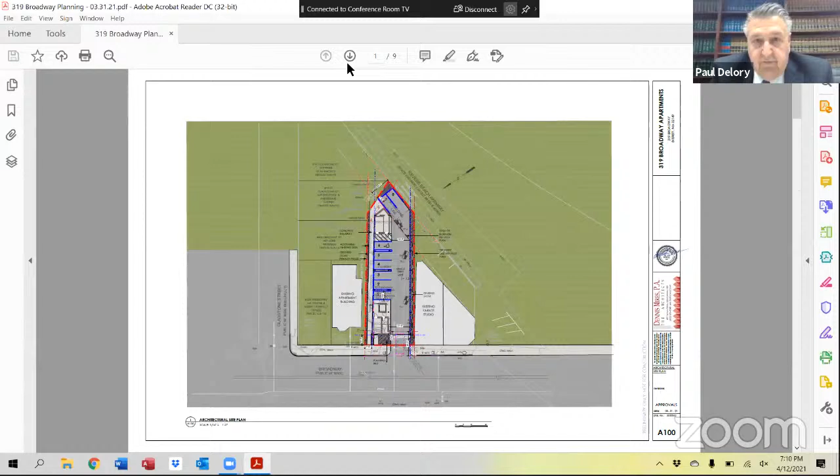Great, thank you. To the members of the board, I just want to refresh your memory - the proposal is to raze the existing building, which is an old and abandoned single-family residence that served at one point as a funeral home for the Rocco family, and to erect a 20-unit building with 3 affordable units.

We were before the board and there was a significant amount of discussion last time concerning the amount of masonry in view of the building standards. So the team went back and put our heads together to address that issue that was raised. We did so by adding additional masonry to the facade of the building, which would be applicable in terms of facade building standards - that's the facade that faces Broadway and the Revere Beach Parkway.

If you look at the proposal - I'm also joined on this Zoom conference with Mr. Mires, who's the architect. I know you were on the screen earlier, but I was looking for you. I think he's here in case he wants to comment. But if you look at page 201, that's up on the screen right now, we'll share the screen on our end.

The overall facade on that Broadway elevation is 2,400 square feet, and the brick required at a minimum is 20%, or 480 square feet. The brick now provided is 960 square feet, so that's 40%, double the minimum requirement. If you look at the long column, you'll see it's been extended upward towards the top of the building, and there is brick around the garage door. So that's one item that's been additional.

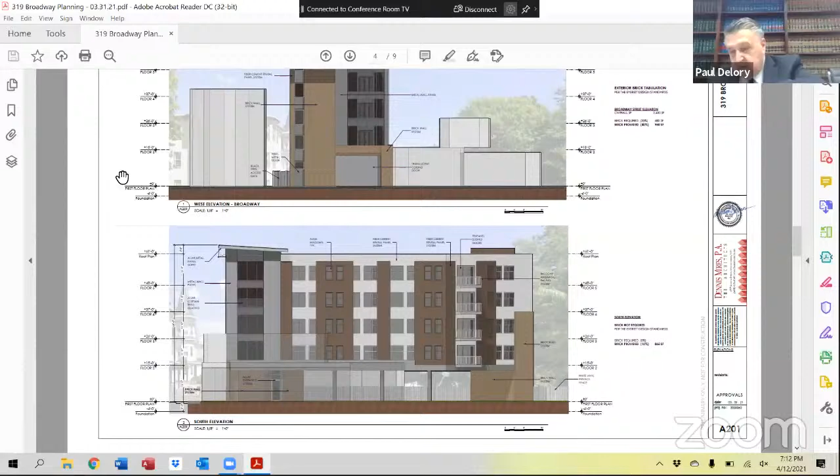If you look at the second picture on that slide, under the building standards there is no brick required on that side of the building because it doesn't face one of the major thoroughfares. However, the architect has provided 15% brick, 865 square feet. If you look at the next slide, 202, this is the back of the building, the rear that faces the Revere Beach Parkway, and that's 2,120 square feet of area. Again the minimum is 20%, 425 square feet, and the architect has now raised the column of brick to 32%, for 660 square feet.

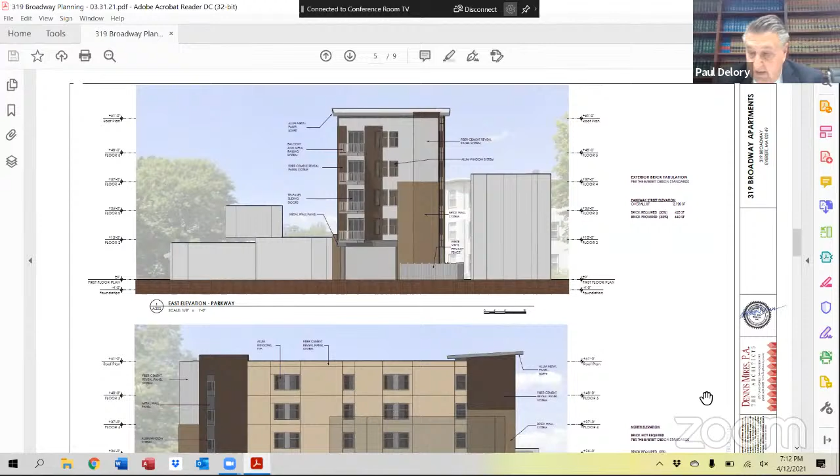And then lastly, if you look at the other side, which would be the north elevation facing up Broadway towards Everett Square, again, it's not a facade which faces a major thoroughfare, so it's not technically covered by the building standards under the architectural details. So there is 0% required, but 15% has been provided, 785 square feet.

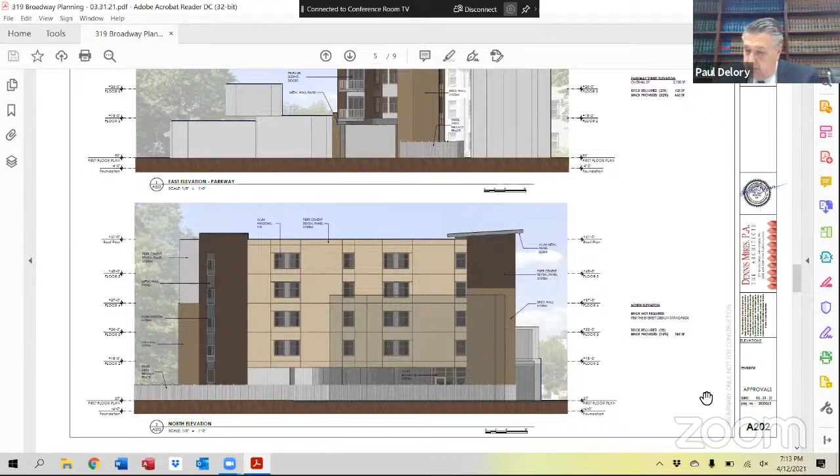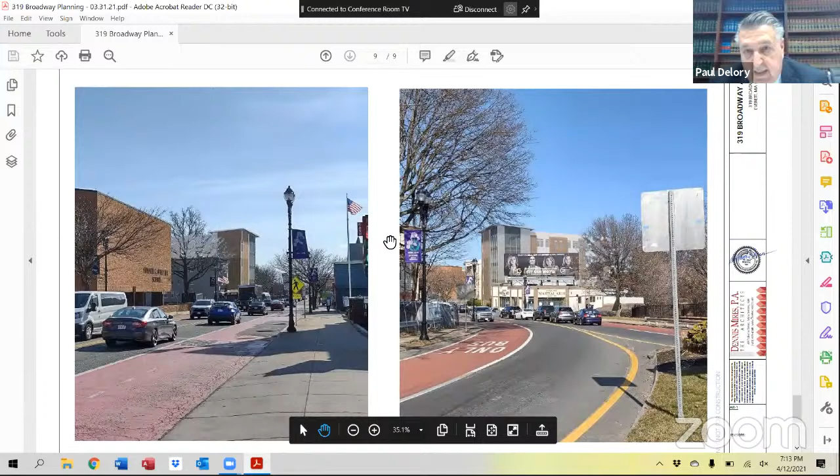If you see where the building is sited and you can see how it will look when completed, the north face is nearly entirely covered by a three-story house next door. The south face facing Boston is significantly covered except for the top floor, with both the karate studio that's there on the corner plus that billboard.

And so the addition of even more brick there wouldn't achieve the look that I think the board wants, and certainly it seems like it would be an extra expense. They'd rather concentrate on the front end and the rear of the building. So I think that's important to see, that every effort has been made to try and blend that in.

And again, I'll let Mr. Mires speak to that, but that's been the concept of using both a darker brown, a lighter brown, and the light color in there as well.

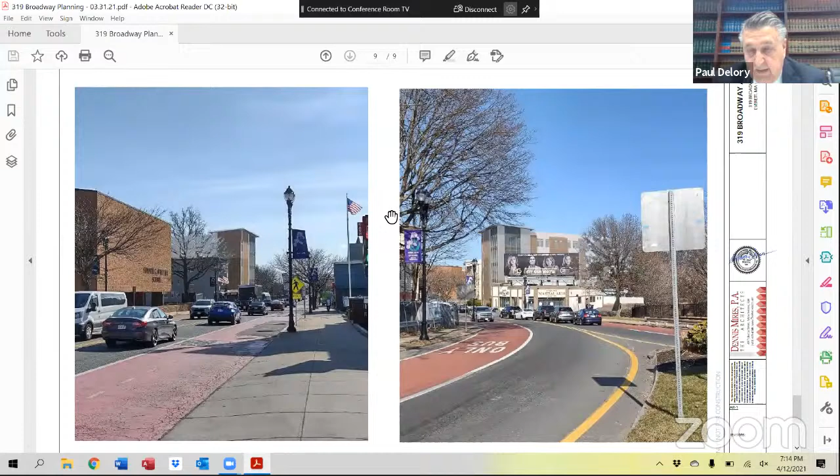One of the really dramatic effects of the building, which is very appealing, is the aluminum corner there with the glass and the aluminum paneling on it. That's a very striking look as you come around the Rotary. It's a very, very impressive look to see.

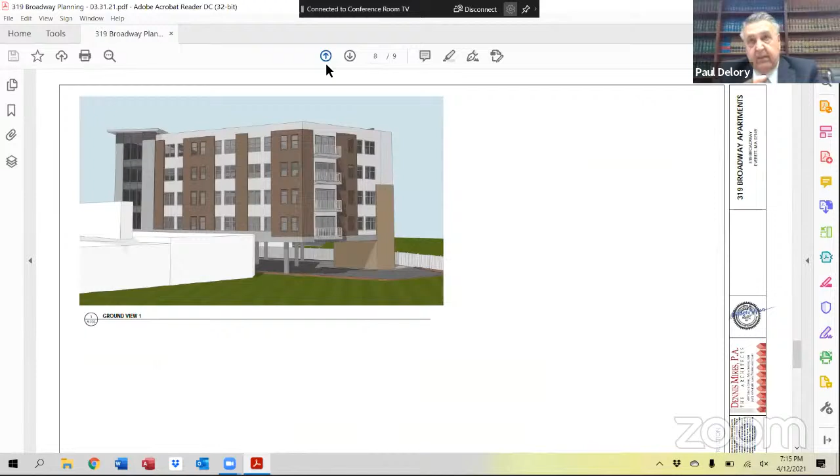And a couple of things I want to point out with regard to Mr. Catino's comment: he talks about parking, but you think about this building, there's 8 parking spaces for this building. And there are no other resident stickers that will be allowed, and if there are any allowed based on frontage, it will be very small.

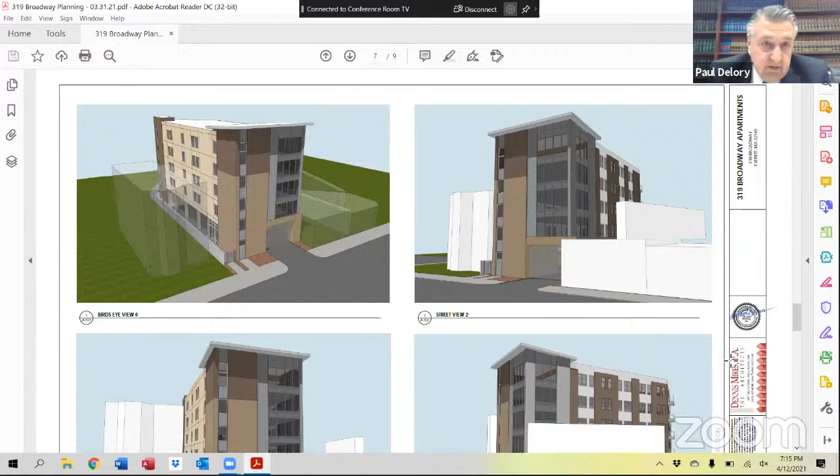The people that have a car that can park there, that's one thing, they'll park under the building. There really isn't any resident stickers for the remaining residents. So there's really not any negative impact in terms of parking.

And, with all due respect to Mr. Catino, I drove by and got out of my car and looked at his building, and he's got a full house there with a lot of the residents parking in the schoolyard. Watch some of these people get out of their car and walk across and go into his house. And that's a 3-family house with a number of people in that house.

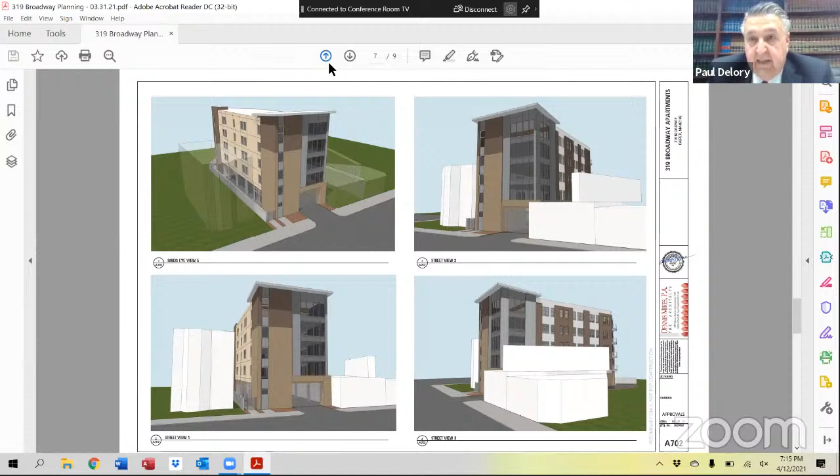So I don't think the building would lead to parking issues as much as the density that he has there. He has probably a greater FAR than this building. So I just want to clear that up. I understand his comments and I respect his comments, but that's something that we are not going to contribute to the parking issue beyond what's going to be parked on site.

So I'd be happy to answer any questions.

I'd like to ask Mr. McKeon if you want to add anything to that. I don't know if you can hear me. I can. Can you guys hear me? Yeah, I can. Yes. Thank you, Mr. Chair and Board. This is Mike McEwen from Dennis Mires, the architects. Paul, I think you did a great job. Thank you.

And I don't have anything to add at this time. I'm sure there'll be questions. That's why I called on you.

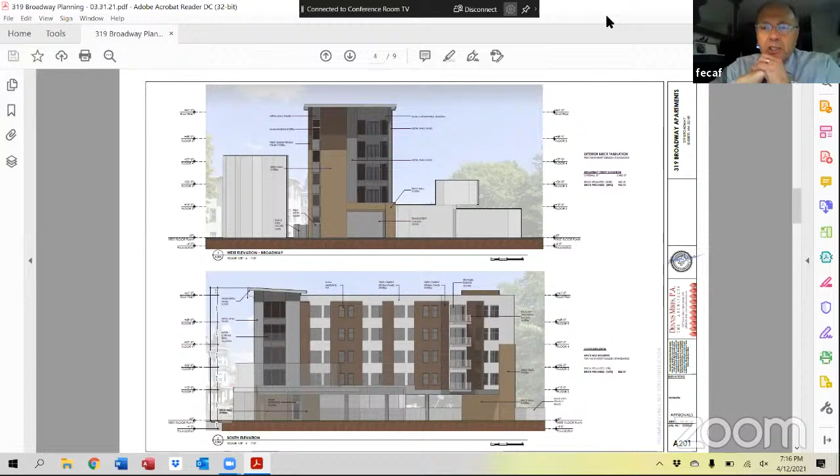Now, Mr. Delory, can you hear me? Yes, I can. Now, from our meeting this evening, whether it goes and continues or whether it passes or doesn't pass, the next trip is to the Zoning Board of Appeals, is that correct? That's correct. So we're the first outlet, and then your zoning ZBA is next, is that correct? That's correct, and just to complete the circle, as Attorney Stein mentioned, we'll be back to you for the inclusionary zoning.

We use one particular agency, but this particular client has worked with another agency, and they're engaged now, and I would think shortly we'll file an IZ request with your board. But yes, the next stop is the Board of Appeals. This sort of came up when Jim Soap was building inspector. They reversed the process, and they wanted to go to planning board first, then ZBA, and this started under that format. So that's why we're here first as opposed to ZBA. Thank you.

Can I just clarify through you, Mr. Chair? This is Robin Stein again from KP Law. When you go to the ZBA, you're going to be looking for variances for parking, FAR, and number of stories. Anything else? That's it. And you're providing, is it 9 spaces on site or 8? Eight spaces.

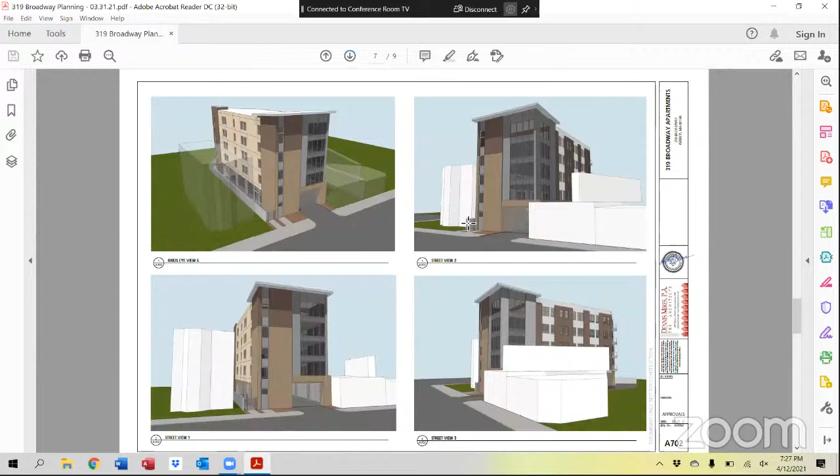If we can go to sheet A702, the view 1 and view 2, the top there. If we can zoom in a little bit to perhaps the coiling door, I just wanted to address that first. So we heard the board's comments last time that we didn't want something that looked like a garage door per se, that we wanted something inviting. And the idea here, if you look closely at the images, that was not able to show in the rendition on the last sheet, just given the perspective.

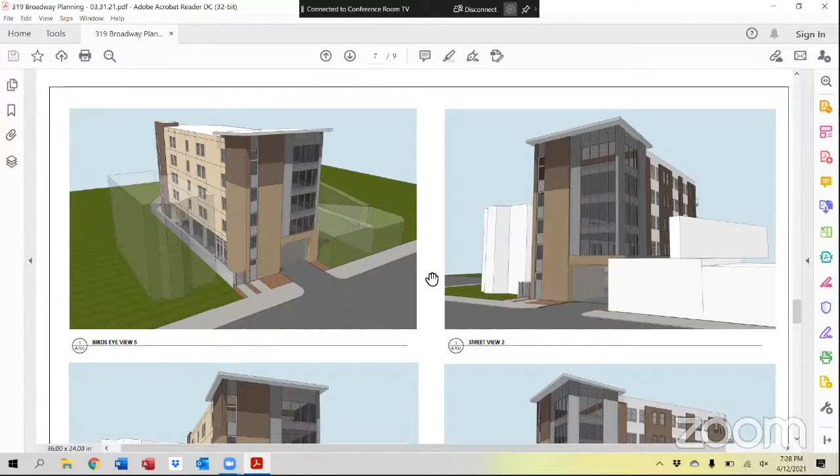This is actually a tinted dark translucent material. So if you look closely at these images at the door, you can actually see through the door. The idea was that you can provide a door that has a tint to it for safety reasons, but that it's inviting. It doesn't have that metal slat look that Mr. Pisano was referring to here. We tried to address that in the notes on the elevations, as well as these views, which tell the picture best, that we wanted something that would function safety wise, that would have some visual privacy, but also not be aesthetically unappealing.

And what Paul was referring to in terms of the setback, you could see that the brick returns in and around all sides of the door and actually deep into the building, which you can see on view 3 right there. I believe you only set back 3 foot 6 inches from the face of the building with that coiling door.

Yeah, it's 3 to 4 feet, Leo, but it's 26 feet from Broadway. Yeah, but that's not what we see. We see it from the building. It's only 3 foot 6 setback. Right. The goal here was that you could get a full-size vehicle, a full-size extended cab truck, or a work van, a longer vehicle off of Broadway up to the door with time for the door to open and queue and not hold up traffic or impact traffic.

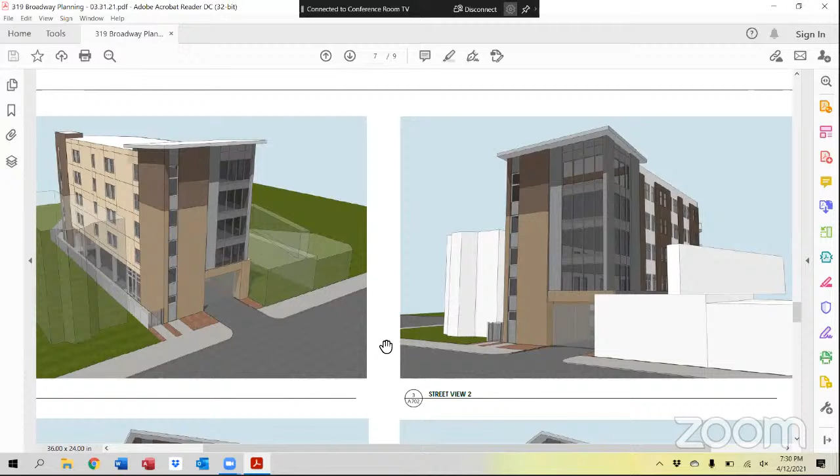Why couldn't you move the door deeper into the building? You have plenty of space. I'm looking at your architect's page A100. You seem to have plenty of depth. And as far as the aesthetics of that metal door, that metal grate, let's call it a metal grate, a plastic, whatever, it looks like a liquor store where they pull down the grate at night.

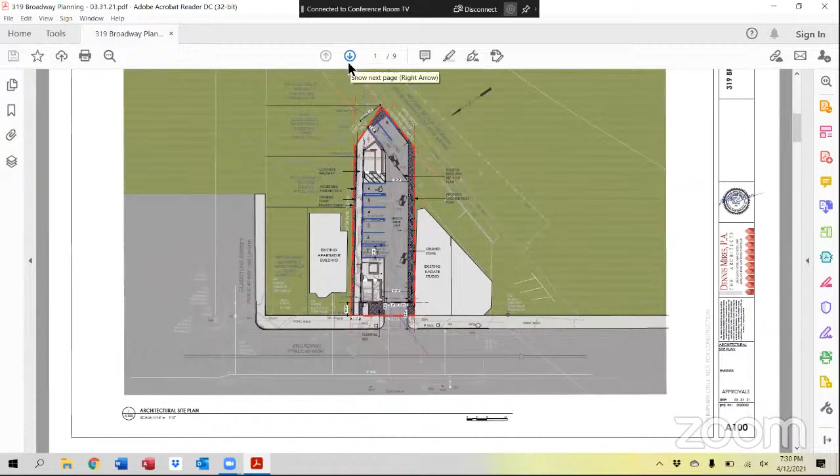It doesn't look. So Leo, I think you're missing the picture here. This is actually a see-through material. It's not going to look like a metal material that you'd see. If you go to those images, you can actually see that there's some transparency to it.

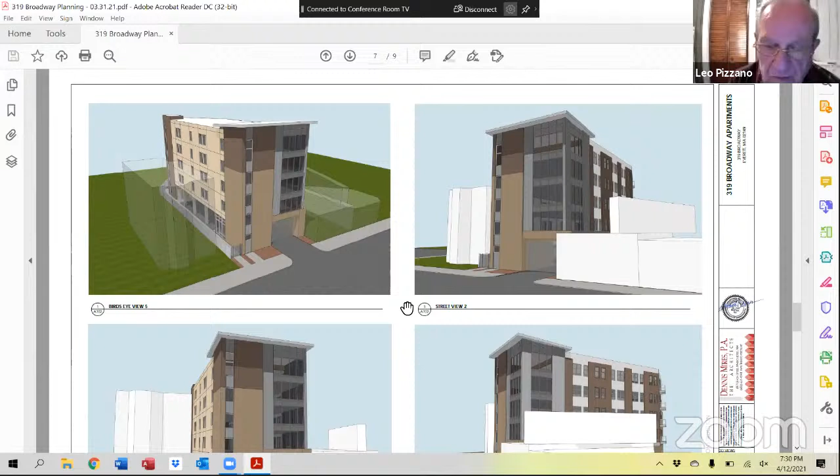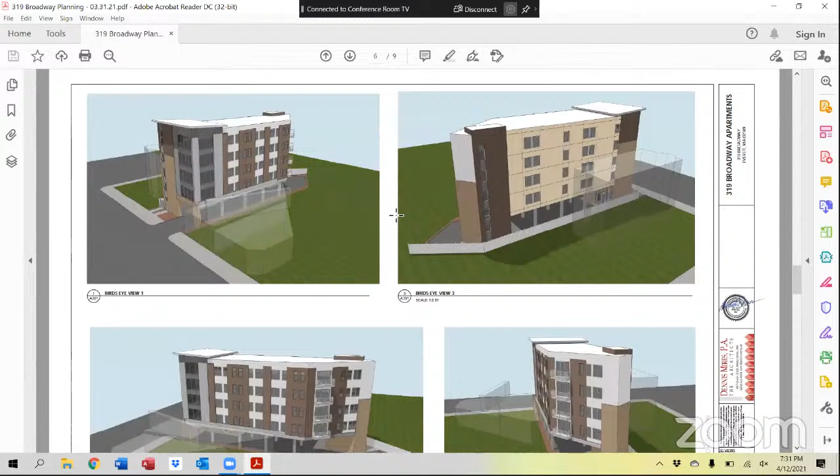That's correct, you can see through it, or it's translucent to an extent. Maybe if you brought us a sample of the product, we could understand it better. Sure. But to your earlier question, if it's possible to move the door farther into the building, I'd say that it is. What we were trying to be sensitive to, if you look at that A101 sheet, is there is an access door from the garage side into a small vestibule, and we just wanted to find a nice balance between the approach side on either side of the door.

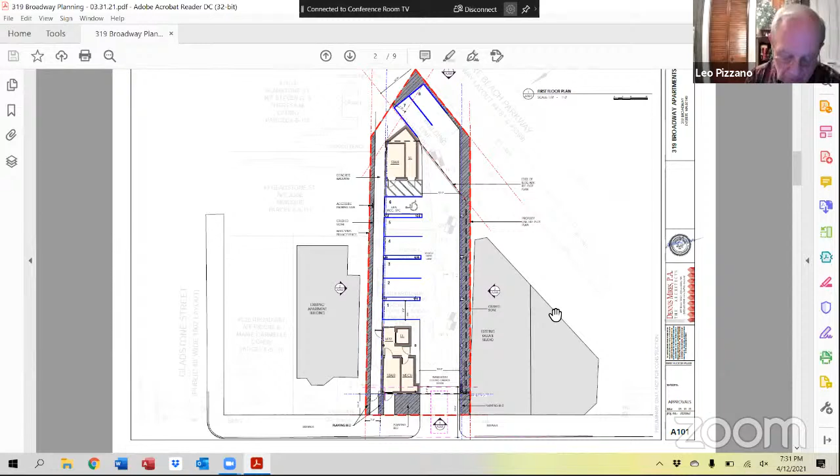Such that people aren't in a space where a car is going to be when they're exiting through the door. You can see the small man door there, just north of the mechanical room. A good building to look at is the Rovierre building right next to City Hall. If you look at that, it has a coiled door, but it's probably set 15 feet deep into the building. You don't even know it's there. That's why I say setting that deeper into the building will just negate that it's even there.

Sure, in all honesty, I feel like we have a lot of options with the door. Good. And it's not a difficult thing to look at different door types and or setting the door deeper into the building. If that's something the board would like, it's certainly something that's not difficult to do.

What we wanted to do is have the door almost blend in with the facade, and that's why we tried to go with a dark tinted translucent material, so that you're not even noticing that it's there. It does its job, but we really wanted the brick to be the standout on Broadway because it's going to be very, very striking.

We agree with that. That's why I think the door, whether it be translucent or whatever, detracts from the beauty of the aluminum tower, your glass and aluminum tower. I think it detracts from it.

It can be set back where you don't even notice it. I mean, that's whatever. Try to come up with something, Mr. McCann, please, would you, to remedy that? Make the door disappear. I don't know why you don't get rid of the door altogether and put in, like I say, a wrought iron gate that opens up.

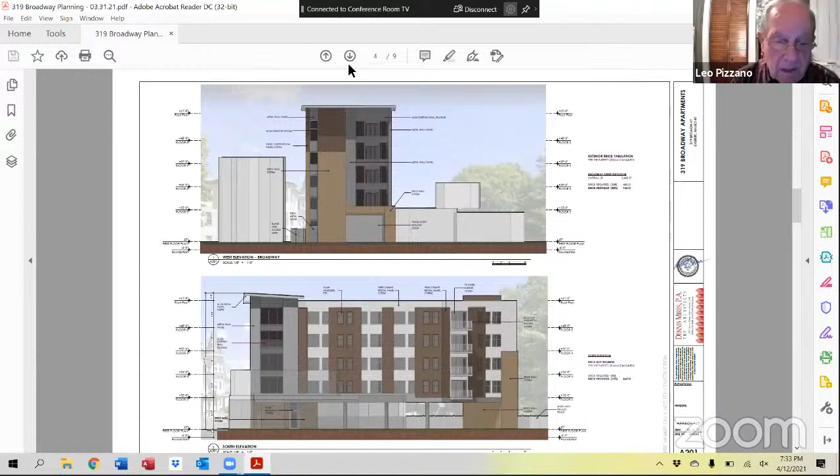Again, I hate to use the term like a villa, but something that has some aesthetics to it, that looks nice, that you can leave out there and you just push the button and the two gates open up and the cars go in and out, whether it coils up or swings in. I don't know if it matters, but I think there's a lot more options than a coiling door.

Yeah, I will just add to that. The swinging gate is a nice design feature. Unfortunately, we're limited with the space that we have between the door and Broadway and inside the building. So we need something that's going to raise vertically and up and out of the way where you don't need 10 foot in front of the vehicle for it to open.

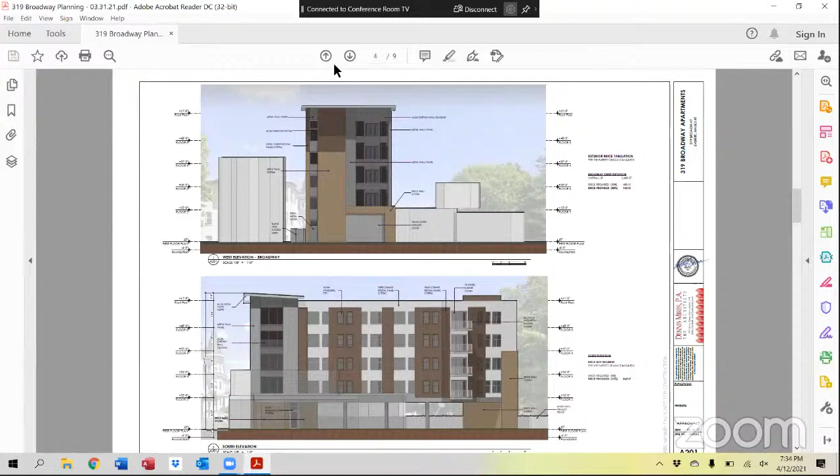That was the reason. Why can't it open in? Well, again, we're trying to be sensitive to people parking, pedestrian walkways, and where the cars are going to queue inside the building as well.

I'm looking at you. I can address the green space. With regard to the design standards, we had large planting beds out front of the building at the base of the masonry walls that we'd like to have flowering plants or some other type of greenery.

And we also have an option all along the privacy fence and in other various areas within the site to provide more than the 15%. You have more than 15% green space? Yeah, that's not an issue at all.

Okay. We had on the plans been toying with drainable materials, some river rock and some nice pretty stonework that's going to be maintenance free, and just hadn't dialed in exactly how much of each we would have just yet.

I don't think it's a problem between your building and the karate school, what product you use there. It becomes an alley more than anything. When you exit out the back of the karate school, that should be green space, not gravel or stone. It should be grass, period. Be honest with you, or plant shrubs, whatever. That's why it's called green space.

Yeah, and we have no problem meeting the 15%. That's no problem. Okay, very good. So again, I guess we're stuck on a couple of issues.

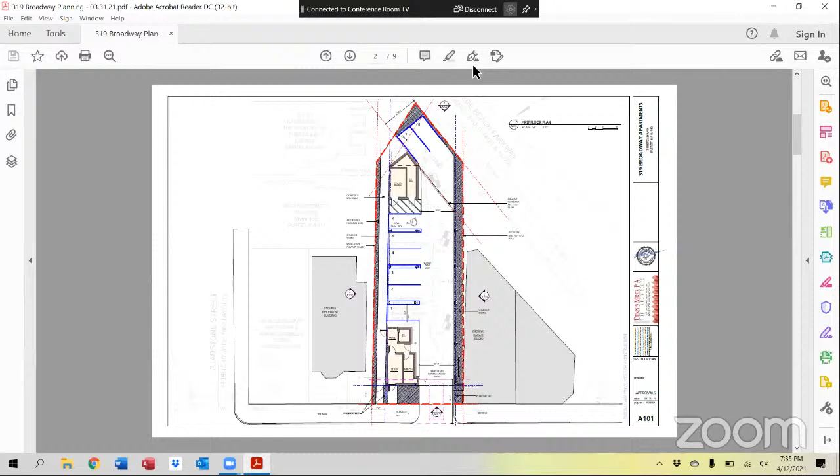Yeah, and I would just reiterate to Mr. Delory's comment, we did fight with the height and the stories of the building and looked at it in great detail to try to reconfigure the units. There's been a lot of study and a lot of time put into that. And given the dimensionality of the site and the space that we're working with, unfortunately, that fifth story is a must to get the numbers to work for our client.

But I will also add that we were very sensitive to the height, and that's why we kept the stories as short as we could to keep us underneath that 65-foot maximum height for the building. And we tried to be sensitive of our surroundings, and we think that rendition, that AR1 sheet, is a really good example of trying to meld the new modern elegant aesthetic with the traditional and the brick, and just have a really nice showpiece as you come into the city from Boston.

Okay, well, try to put as much together for the next meeting as you can, and we'll go through it again and see what you come up with, okay?

So, any other questions, I can ask Tom? Leo, if I can, Mr. Chairman? Paul, so you would like a sample of the garage door material?

Is that one of the things you'd like to see? You can bring it, but I'm almost negative to the whole idea of it being any kind of coiling door whatsoever. I can't see why it can't be a gate that opens into the building. If you have a 19-foot opening there, 2 gates, 10-foot whatever, and they open in. There's no cars queuing in there. You're not supposed to be parking cars there because then people can't get in and out.

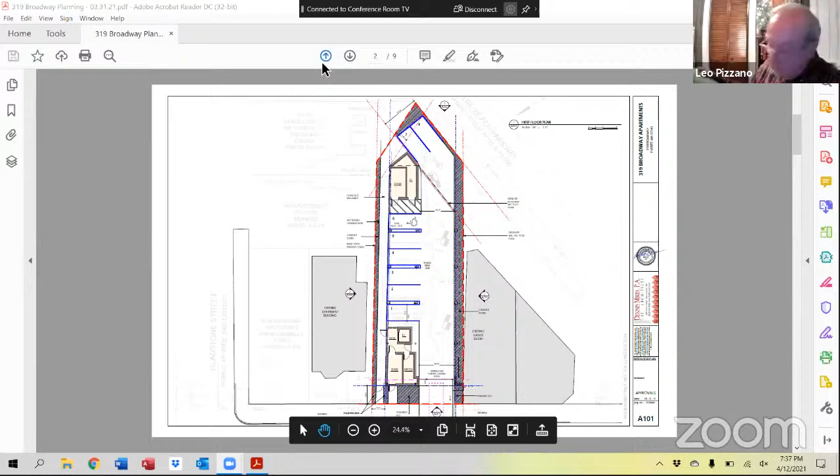So as I look at your drawing here, A101, and I'm looking at that area, you have a great deal of area there to allow those doors to open in, no problem at all. And I would really like to see those doors go and put something nice there that even in a closed position, if it is only 3'6" back, looks nice.

Let them open in. And as far as queuing, you're right, they should be even deeper into the building so you allow better queuing so pedestrians don't have to stop when you've got a truck sitting there waiting for the door to open. Not that it takes more than a couple seconds - I'll agree with that, I don't find that being a problem if you had to wait 5 seconds for a door to open and a truck go in.

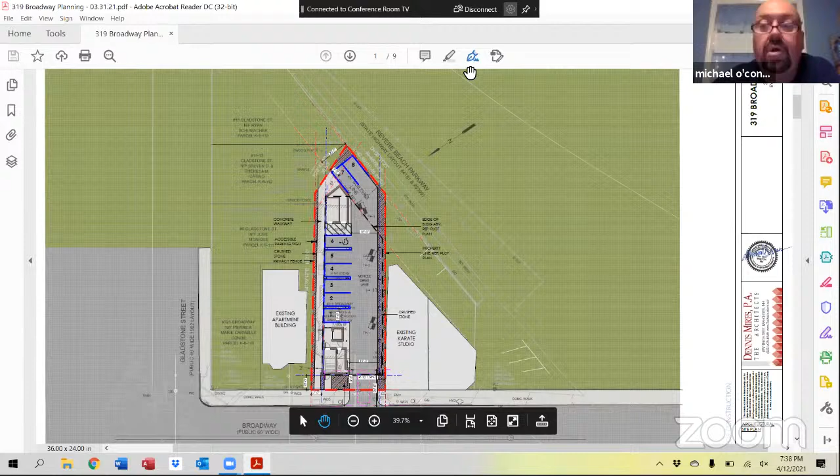Thank you. Any other questions or comments? I've got one question - does anyone know the approximate height of the current building? The building that's on the site now, the current height of it, any idea? I don't, maybe the architect can say, I'm not sure.

It looks to me, based on the photometric plan on A202, Mr. O'Connor, that it's about 38, 39 feet. That was going to be my comment as well - it looks to be just above 35, 37, 8 feet. Okay, thank you. Yep.

Any other questions? If I could also just say, one of the difficulties in dealing with this particular zoning matter when talking about height is that the city makes a determination that 65 feet is the maximum, and the fact that the stories are a little bit lower was still within that 65-foot limit. So the intent of limiting the height has been met. Just by virtue of the fact that the floors are going to be a little bit narrower to accommodate that 5th floor, it really still stays within the height range. So a lot of thought went into that as well to make sure that was not one of the areas in which we were out of compliance dimensionally.

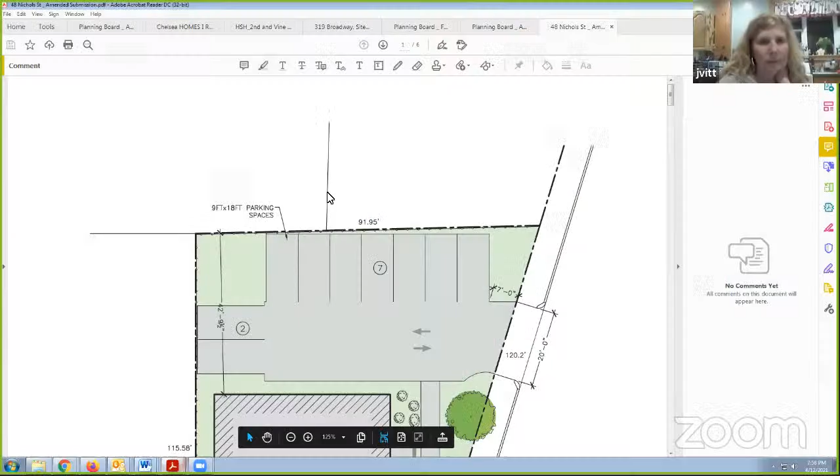So members of the board, if you recall, I was before you about 12 weeks ago with a similar proposal to build a 6-unit building. The building shape, size, and look hasn't really changed.

I have made some material changes to the plan as requested and as heard by the board. I changed the entrance from the Nichols Street side to the Woodlawn Street side. I moved the bump out down from where the porch was to the corner of the building. I removed 3 parking spots, 2 of which came into question before the board because of the side yard and rear yard setbacks. Leo had commented that he was concerned I would probably need a variance because it was too close to a window, so I eliminated those when I reconformed the building.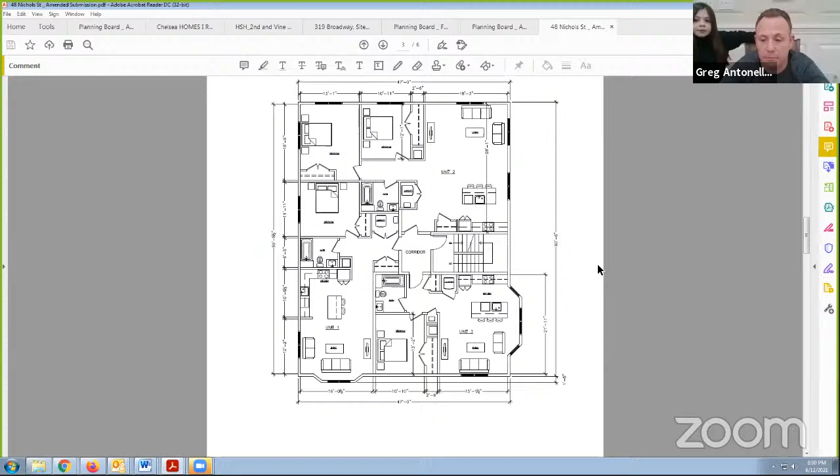I have a question on this. Go to the floor plan - are you only going to have one egress? Yes, that's correct, one egress now. Don't you need 2 by code? By code, you don't need to, it's in the building code - one egress on a 3-story, 9-unit building. My architect researched that.

What do you think, Cheyenne? Is that right, Cheyenne? I have to check, unless it's on the new code, I don't think so. I don't either, that's correct - two egresses for all buildings. But okay, we'll let the building inspector worry about that.

The last time you were here, we talked about gutters. You didn't think this board had jurisdiction over that, but we do, because it's part of sections 28 and 29, stormwater. We don't want to see water draining into the adjacent lot. So give us an idea what you're doing for some kind of gutter system there.

I don't recall you even mentioning gutters. Yeah, because you commented that you didn't think we had jurisdiction, and we do. Truthfully, I don't recall that, but this is a flat roof, so this is going to have roof drains. The last one didn't. Okay, that solves the problem. The last one was similar, but this will have roof drains and the interior leaders will be discharged out.

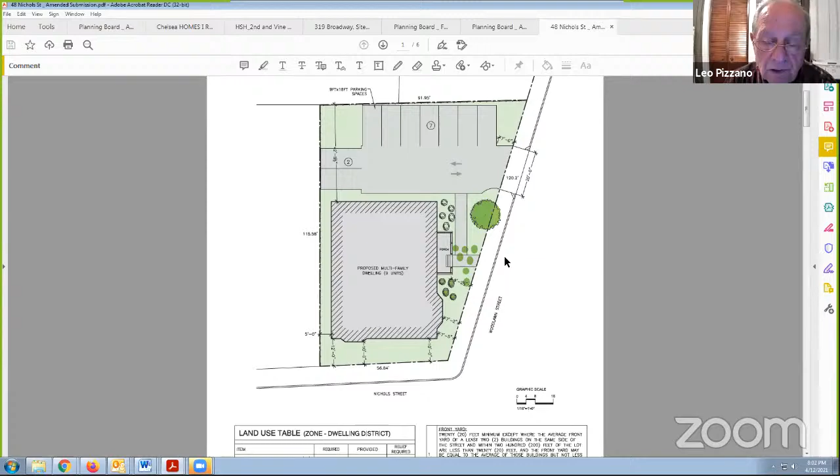But this is a flat roof, so there's no particular slope to either side of the property, front, back, left or right. They'll have interior roof drains, but it'll be a flat roof, which will have drainage up on top the way the insulation pitches and stuff. So it's the insulation that pitches, not the roof. Correct. No parapet around it or anything? I don't think there's going to be a parapet on this one. It looks dead the way it looks like that with no parapet. It's just a flat surface.

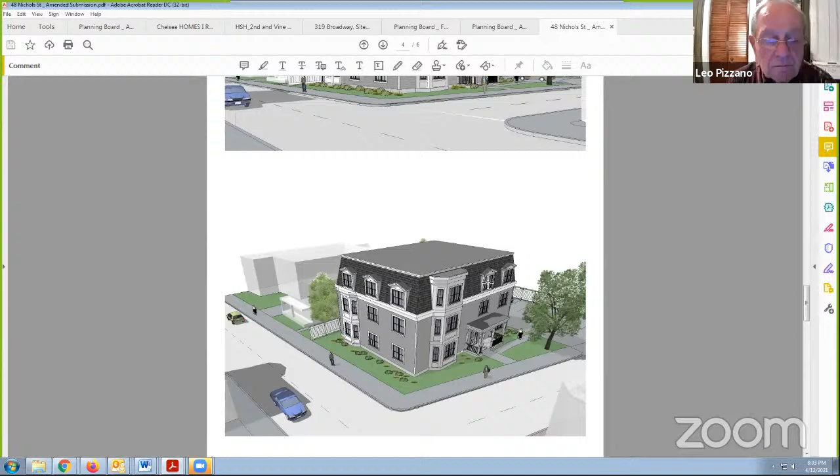There's one on the Fells Way over in Medford, I go by all the time and I look at it and say, flat roof, why couldn't he put some detail, a cupola in the middle or a widow's walk or something, other than a flat looking building. On this particular design, to be frank, I'm happy to go straight flat roof and get rid of the mansard on the front. I put the mansard on the front with the shingle look to soften it, to make it flow with the neighbors, to not look like an apartment building. If you want, I could go straight flat, I could go hip roof, but it's going to look massive. This basically softens it. I was trying to make it fit in the neighborhood.

The bottom two floors on the exterior, what is the product that's going on there? I can't hear you that well, I'm sorry. That's okay, the bottom two floors, what's the product that's going on there? The bottom two floors is going to be Hardie board. Okay, we'll talk about that next meeting for sure.

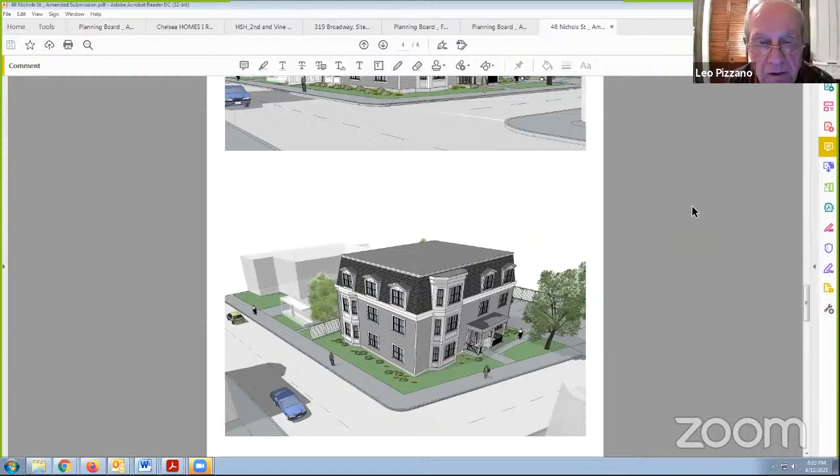I'd like to address it tonight if you don't mind. Oh, you can address it. Get rid of it, it looks like junk. Put some siding up there, put something with some shake or texture, put something on there, not Hardie board. You got a flat roof, you got that flat. Granted. You want shingles? The inside, you want shingles? Yeah, it'll look nice, anything. Okay, I'll shingle it, no problem. Look at the shakes, you can get fiberglass shakes for on there.

I'll put shakes, I'll put shingles, no problem. You put what you want, I'm not telling you what to put there. To be frank, I'm fine with putting shingles. Have your architect come up with something nice down there. That's why we pay architects very large sums of money, make things pretty.

And in your next drawing, that'll help. Okay, anyway. I have no more questions. Thank you, Mr. Chairman. Thank you.

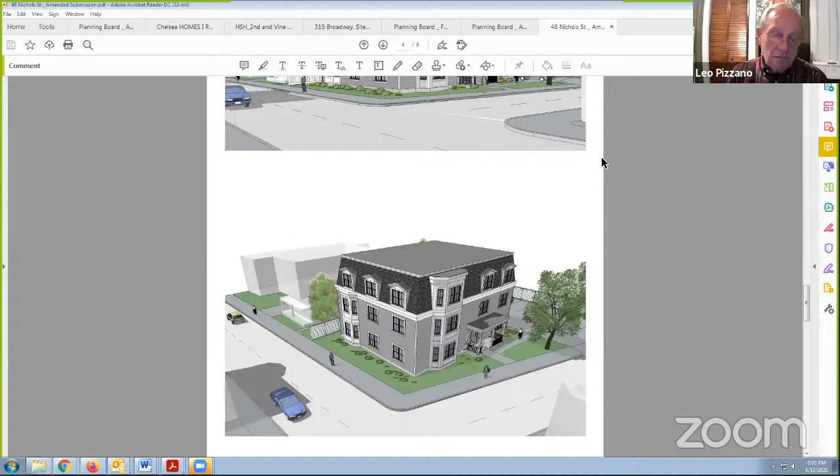So that was the first time I modified them.

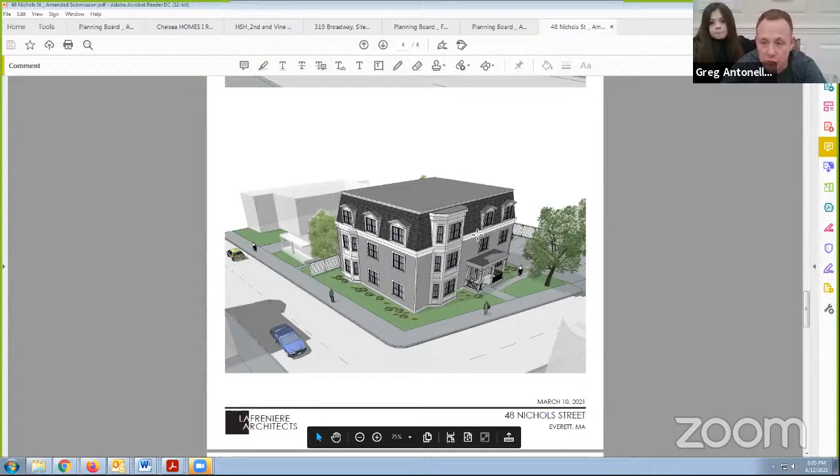Just in responding to Leo, I'm happy to change the siding to shingles or to whatever you want. I'm not telling you what to put really there. I don't want to change it to a straight flat roof, square looking building. I feel the gables and dormers give it some character, so it blends, so it doesn't look like an apartment building in a predominantly residential neighborhood. That's the reason why I chose to design it as I did, with the bump out, with the gables, with the mansard, with the architectural shingles. If I go straight with a parapet, as Leo suggested, then I'm going to end up losing the mansard look, and it's going to go square all the way up.

Wouldn't care if you put a cornice around it. But if you leave it the way it is, Greg, I'm not complaining, I'm just saying it could be enhanced a bit more with a cornice around that instead of a flat way to it. The thing is, Leo, I'm open to suggestions and open to listening, but I honestly believe this is the softest look for this neighborhood and would fit the best. Okay, we'll go with what you're proposing, open to other suggestions or to hear comments from members of the board on their thoughts or opinions also. Absolutely, I'm all set, thank you.

I like the look and shape of the building, Mr. Antonelli. It's reminiscent of my grandfather's house on I Street, believe me. So it's bringing the old back into the new. I like the design, it's not a square box, it has some appeal, and it's decent looking for the neighborhood. Juliana makes a good impression too, she's going to be the rental agent.

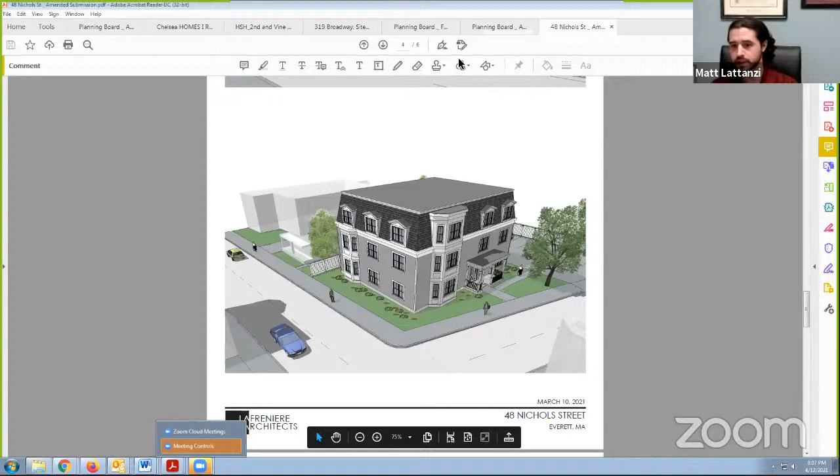All right, any other questions of the board? Any questions or comments on Zoom land? None that I see. I'm actually, hold on, are we all set, Mr. Antonelli, with the renderings? Yes, thank you, Matt. All right, now I can actually look through the chat. I see nothing.

Robin Stein from KP Law. Can I just clarify while we're here, the variance relief that's going to be needed at this point for this project? Sure, so what I see is this variance needs FAR, parking, and a side yard, which I'm short.

Matt, do you have comments back from the building department on this one yet? No. Originally, the only comments were from Mike Desmond, and those were all addressed on the prior project, but they would have fallen within the same comments. Okay, we'll just keep those in mind as the building department takes a look at it and picks up on it.

Being a public hearing, I'd like to continue. I'm going to ask three times for all those that are in favor of this petition. Anyone in favor of this petition? Third and final time, anyone in favor? Hearing none, that part of the public hearing is closed at this time.